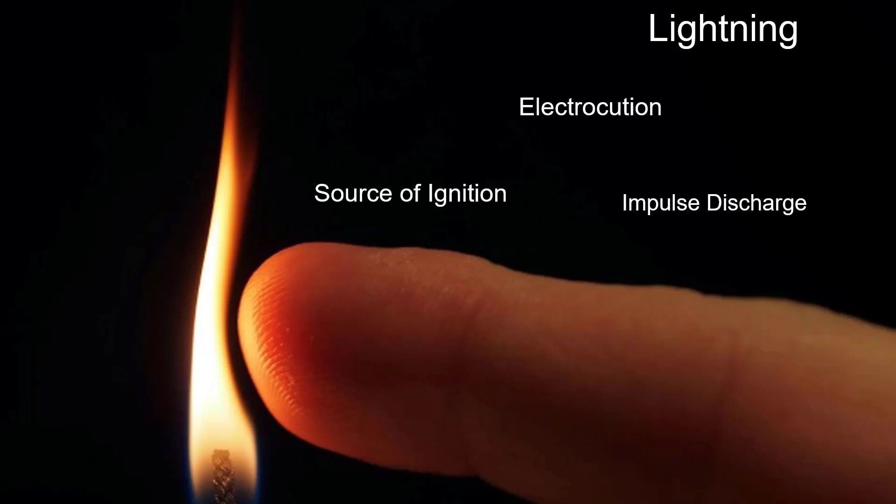IEC have conveniently categorized the risks into 4 categories. I'm going to cover those now, very quickly. Number 1 is loss of life, pretty straightforward. Number 2 is loss of service.

If you're manufacturing a product from a factory, and lightning prevents you from delivering and completing that manufacturing process, then there's a loss of service. There's also historical buildings, monuments, museums, that kind of thing, where there's a cultural element. And finally, good old economic loss.

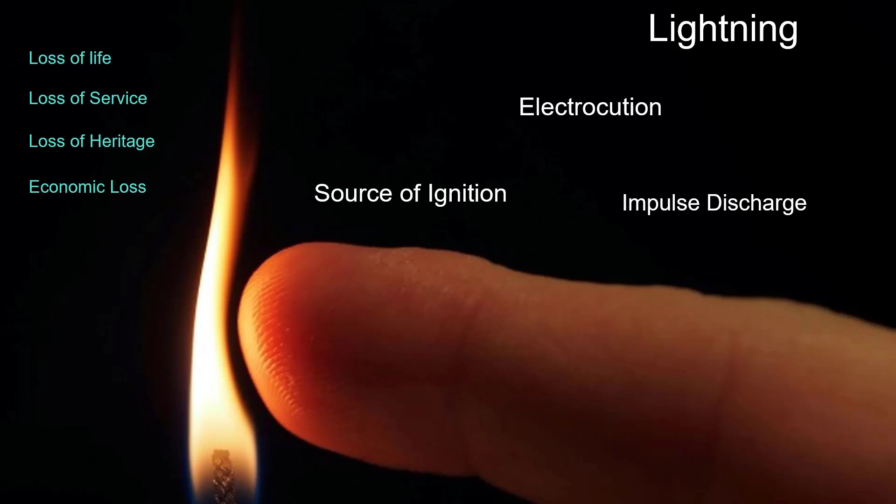Pure and simple. Trouble is, trying to unpick what the economic loss actually is, is a much more challenging task than you might imagine.

There's a piece from Liverpool John Moores University by Atherton and Ash in 2006, which suggested that 80% of lightning strike incidents involve a petrol-related item or product. And the NLSI calculated that in 2008, it cost the US economy $5 billion from lightning-related losses.

Let's take a step back here. This is back in 2008. We now know through climate change that this could be significantly more in today's context, especially since NASA's researchers have identified that for every 1 degree change in global surface temperature, there's a correlation to 5 to 6% increase in lightning activity globally. So that $5 billion back in 2008 might pale into insignificance in today's and near future's context.

Finally, lightning accounts for 61% of all incidents in storage and processing activities. When I say storage, that's bulk liquid storage, the petrochem type, and processing activities. Where there's been an investigation, 61% found that this was due to natural events.

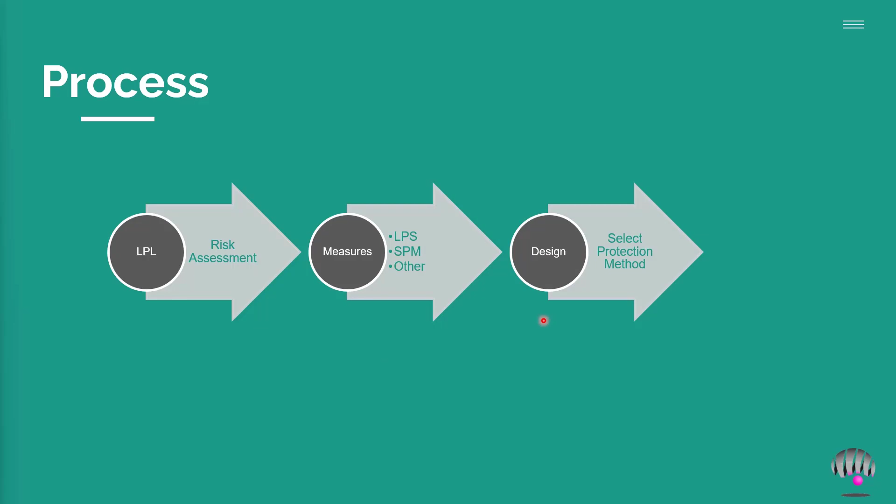Once you've done these two steps, then you can move on to the design side of things, where you select the protection method that you're going to use. So I'm going to bounce back into step one, the most important part of the process initially, to get that LPL. You consider the frequency of lightning, all the hazards that are there, what the occupancy is.

Is it a football stadium that's going to have 70,000 spectators at any one time? The level of panic is going to be huge if there's a lightning strike to that, so that's going to be a high risk issue. Whereas if it's an automated warehouse like Amazon or whatever, there's going to be very little occupancy there, so its threat to life is less.

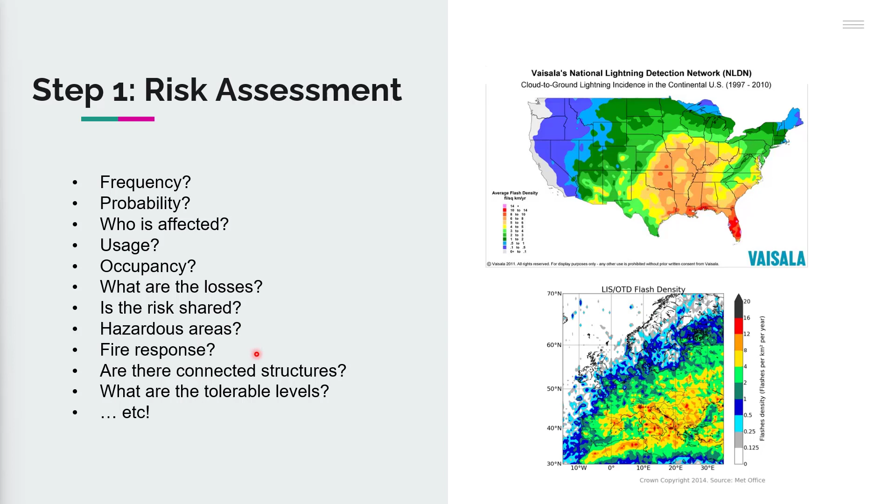Once we've determined the level of protection required, we then look at the lightning protection measures and the surge protection measures. We use DEHNsupport as our software tool to do a lot of the heavy lifting on the risk assessment. You can use a spreadsheet and do it manually, but honestly it's going to take a couple of months to code the spreadsheet, and if you get an update from the standards, then you're out of date straight away. So that's a risk in itself.

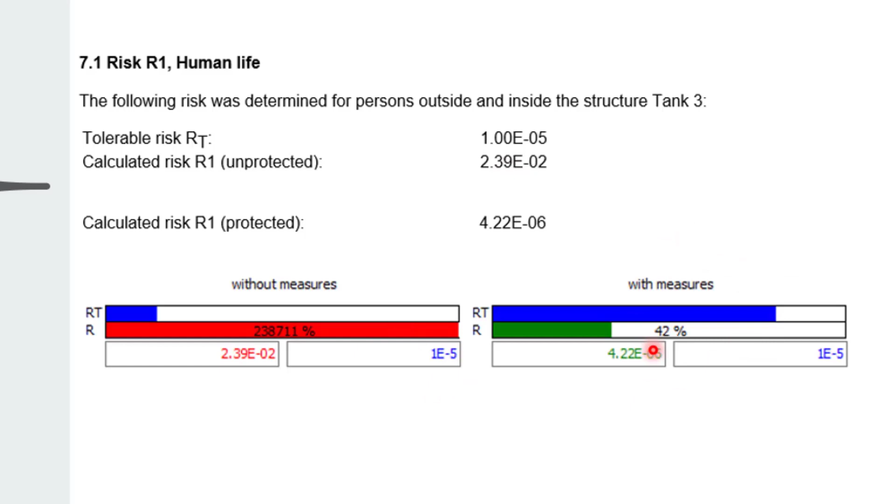What I like about this particular piece of software is that it gives a graphical representation. The blue ribbon is tolerable risk, which is tolerable risk for R1 is 10 to the minus 5 or 1 to the minus 5, 1 in 100,000. We can see that this one is almost off the scale in this case, but we've mitigated with our measures, with our lightning shielding and surge protection, and we've brought it down to almost half of the tolerable level, which has left us a bit of headroom to spare.

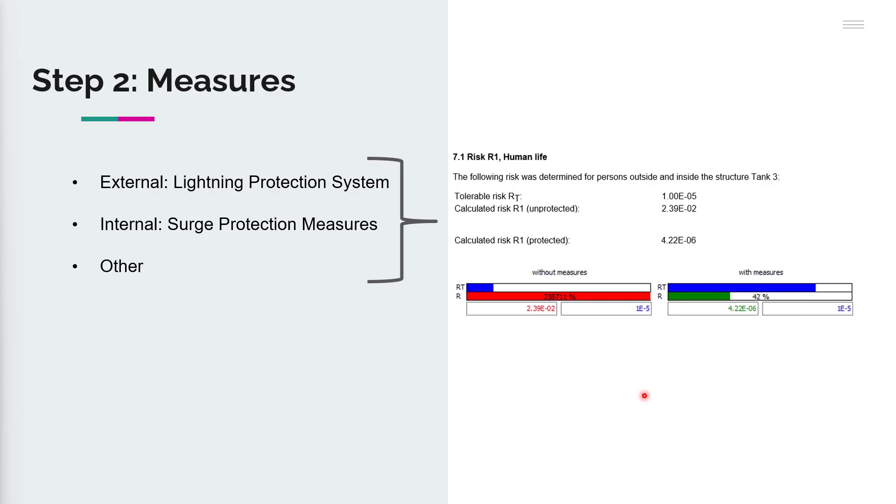So that was a good outcome there, which means that we can move on to the design and decide which protection concept we're going to apply to the structure that we're looking at.

Now, IEEE uses very similar methods to IEC. You call it fixed angles, we call it angles of protection. You also use empirical curves, we don't tend to use that in the IEC version, but you do use EGM, the electrogeometric modeling, which is equivalent to the rolling sphere. I think the Eriksson method is what you guys use on the IEEE.

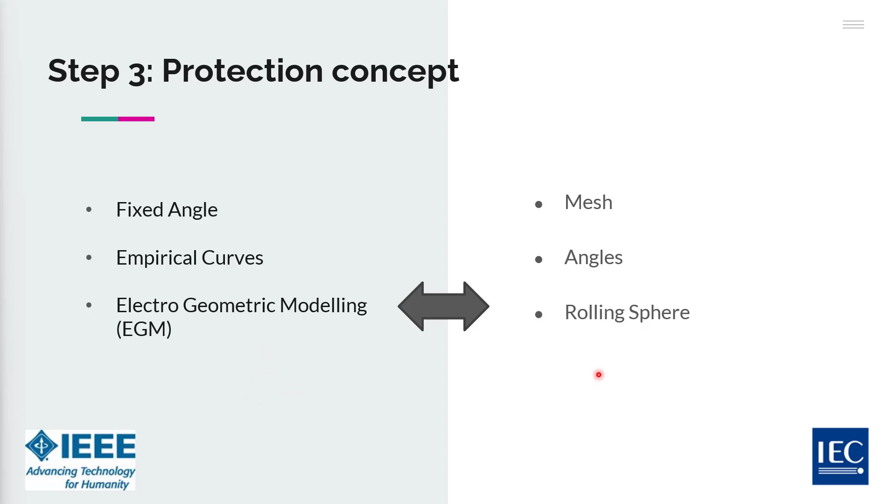We're going to take a look at rolling sphere next, in a little bit more detail.

Now, cast your mind back to the slide where we talked about the process of lightning, and if you recall, the point at which the downward leader reaches its last step, and it reaches its point of discrimination, it starts to want to hunt something to attach to. You remember that bit? This point of discrimination is the center of this rolling sphere, if you like. Now, the dimensions of this imaginary sphere are determined by the risk assessment, the LPL of the risk assessment that you did previously.

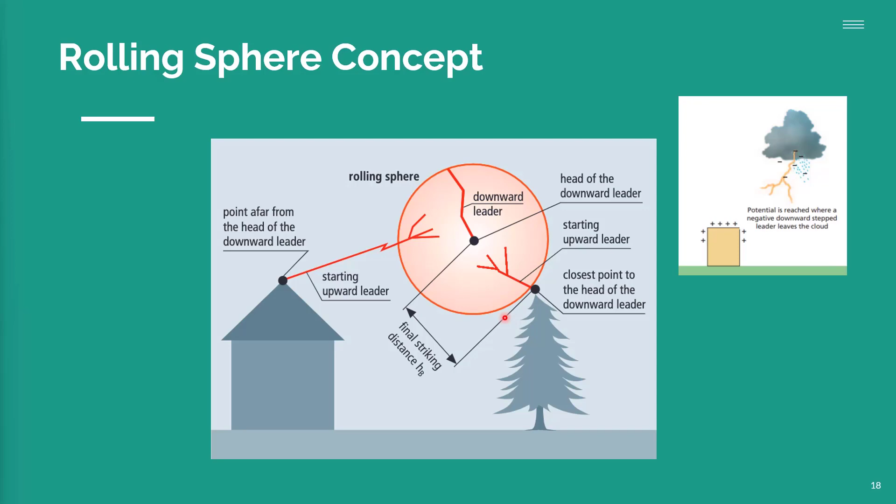But you can see that these are the upward leaders and the point of discrimination, and this is the sphere that we're going to roll in a minute.

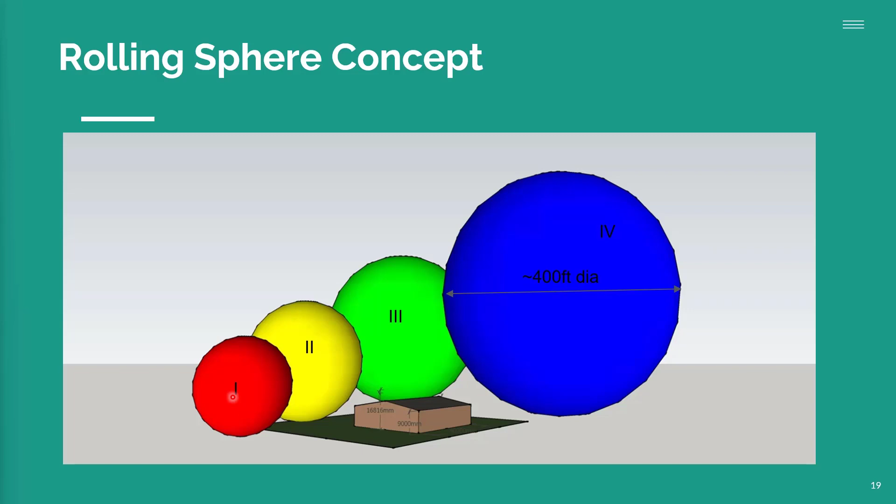I just wanted to give you this sense of scale. This is a 9 meter to eaves building, which is 30 foot, something like that. Has a diameter of 400 feet, its actual radius, pure radius, is 60 meters, 197 feet. Class 3 is 45 meters radius, Class 2 is 30, Class 1, which is the most onerous and the smallest sphere, is 20 meters radius, 40 meters diameter.

So we then roll this imaginary sphere around the structure or building surface that you want to protect. Where the sphere touches, here and here, that's a vulnerable point, this is where you need to deploy your measures, your shielding, because theoretically this is where attachment can take place. The void underneath, lightning protection zone 0B if you want to get technical, is less vulnerable and therefore considered protected, and you don't need to put any measures there, because lightning is a competitive event, it's much more likely to latch onto here or here.

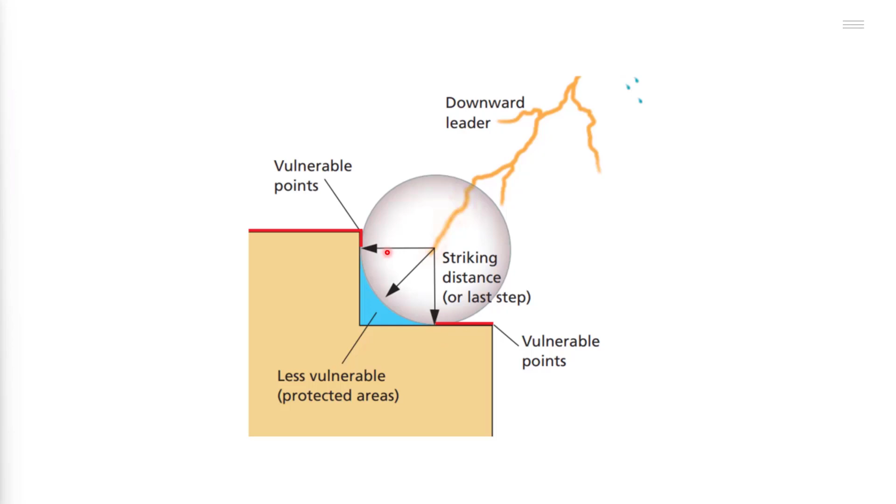Does that make sense? So let's see the concept at work, and I'll set this rolling.

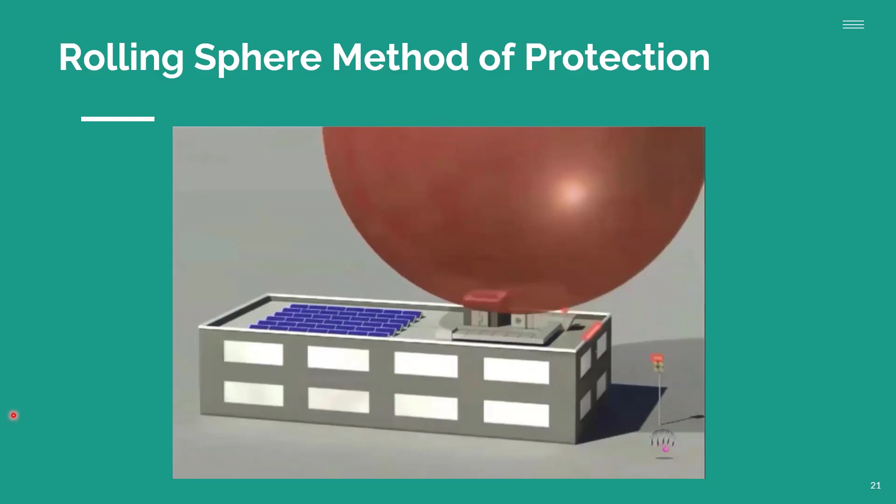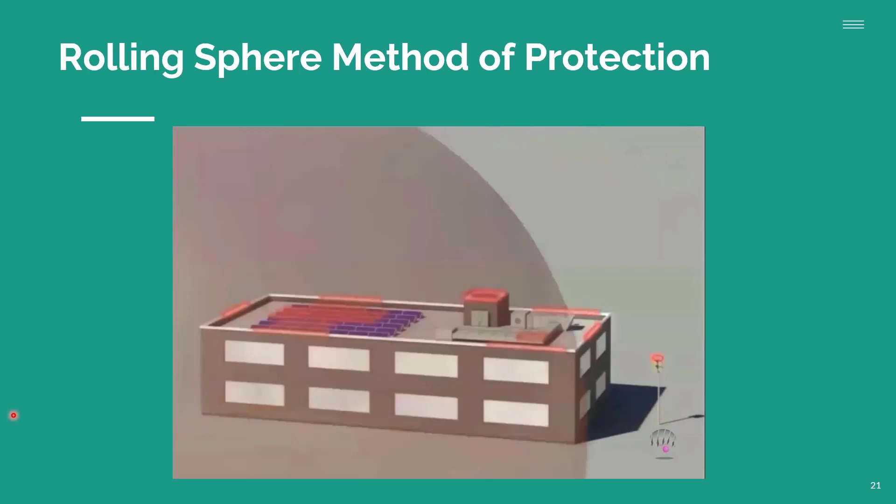So as the name suggests, once we know the size of the sphere, we roll it across the surface of the building we're interested in. Now, the beauty of the rolling sphere method is that it copes with complex geometries really well, which is why it makes it the most technically secure and robust method of protection that we can use.

So you can see now you've got your areas which need some kind of protection installed - a little CCTV camera here included - and we can look at protecting those in more detail.

Now, this video made it look easy, but trust me when I say, if you're trying to do the rolling sphere method in 2D, you will be CADing out arcs and circles galore for days and days and days. It takes ages because you have to consider how that ball rolls in 3 dimensions. And this method is very similar to the Eriksson method, which is also supported by the software tool we're going to look at in a minute, XGS Lab Shield.

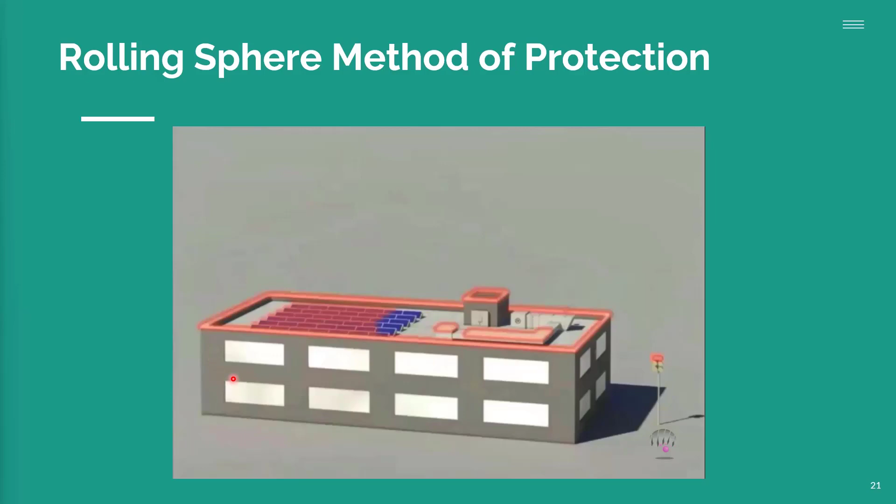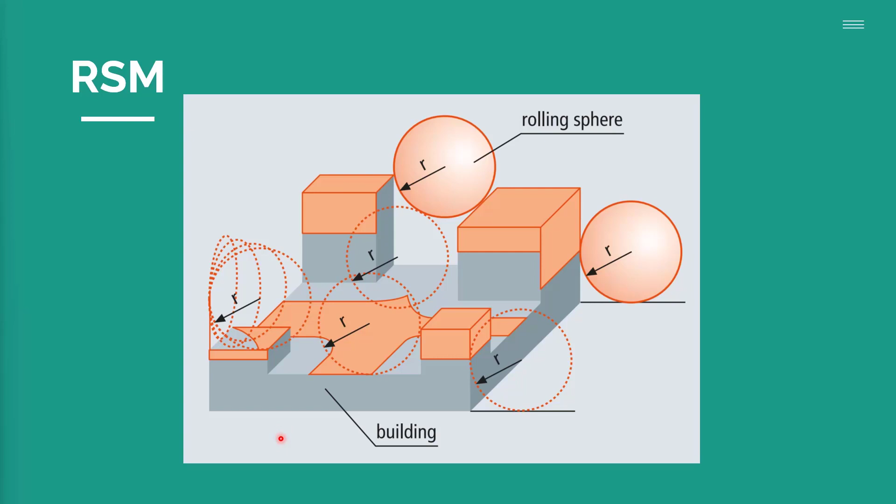So why rolling sphere over angles or curves? Well, as mentioned previously, the rolling sphere method handles complex geometries really well. The angle method is a simplification. I don't intend to go into it greatly here because we can run courses on this for like 4 days at a time. But if you're interested in technically secure, robust protection designs, then it's rolling sphere, the EGM method, that you really need to look at to get the job done properly.

Just to say, I've mentioned a couple of tools here already. At Grey Matters, we use this risk assessment software tool called DEHNsupport. There are others available - we're not promoting this in any kind of way. The other tool we're going to use, and dig deeper into now, is XGS Lab's Shield.

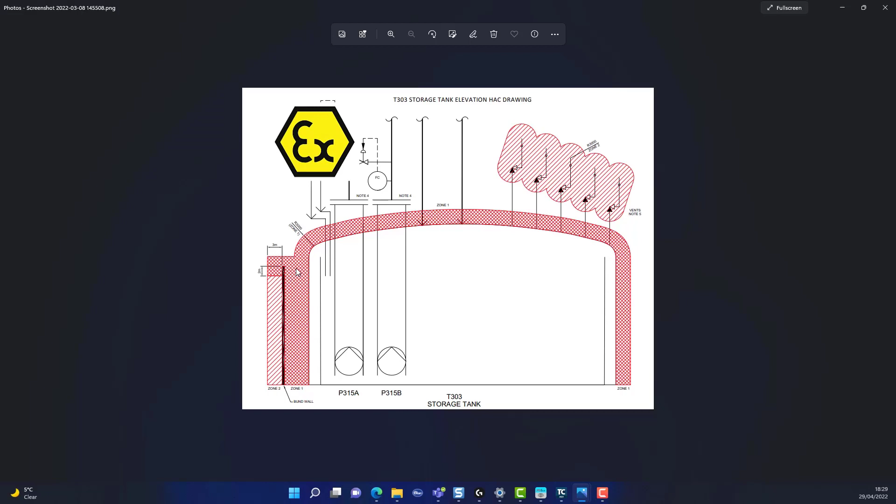Another interesting thing about this is that there is an ATEX component to it. So you've got a zone 2 covering the purge vents, and then there's a volume of gas that surrounds the tank, which we have to be mindful of and take account of. So although it's a pretty straightforward structure geometrically, it's got its complications.

So the first thing we do before starting anything else is to CAD up in 3D the actual tank in a wireframe format. Now you can use any version of CAD that you want: SolidWorks, Revit, AutoCAD. I've got TurboCAD in front of me because it's actually quite a cost-efficient option.

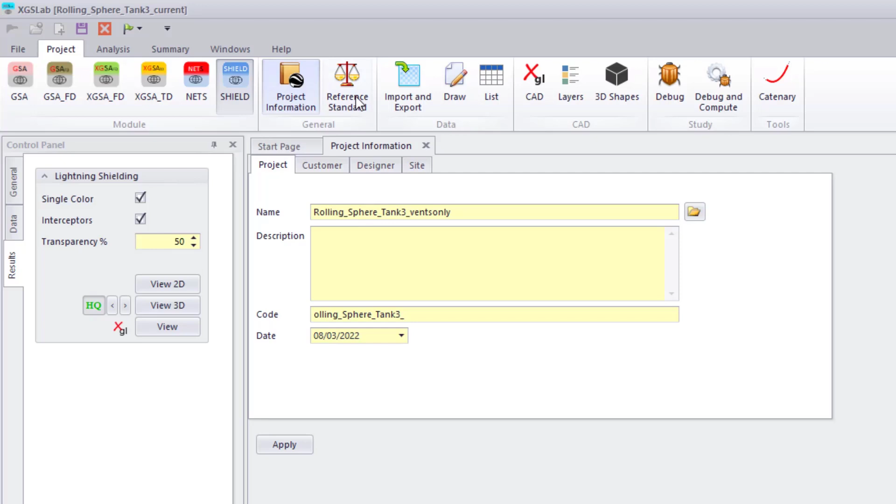So once we've got our wireframe in 3D, we can then import it into XGS. Today we're looking at Shield, and what we do is follow the top ribbon from left to right in sequence. You would normally put the name, what you're looking at, the project name, the customer designer site, if that's relevant - I won't go into that bit here. It's pretty straightforward. So from the project, we then choose our standard. Today it's IEC 62305, and then we'd click on the import option here and steer it to the TurboCAD version and the DXF version of it, and click import.

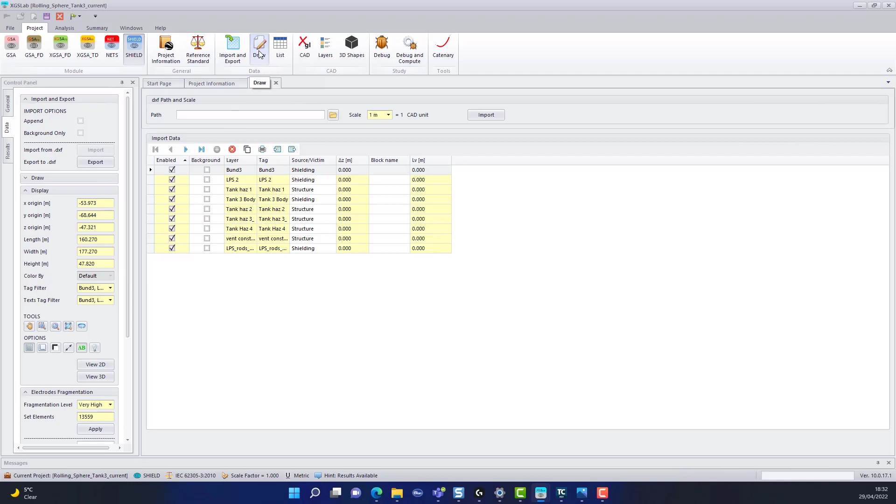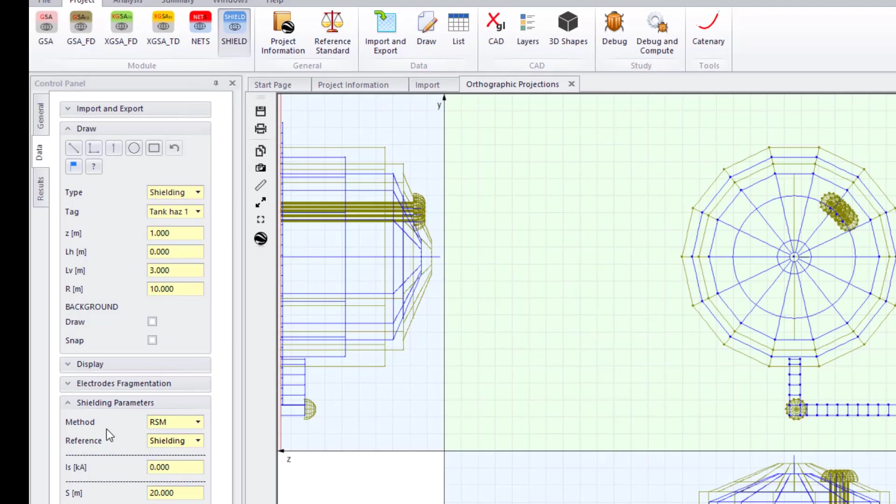Now, to cut down on time, it does only take a couple of minutes, but this is one I prepared earlier. And then we can go to the draw and the layout. So this is a layout, a plan view of that tank. There's a steel trestle supporting the pipe work, and a front elevation and a side elevation to the left there. So that's your orientation. We can then work down the left hand side across these tabs here.

So if you were going to add some more components, maybe there's a lighting mast or something, then you could drop in a vertical conductor to represent that. But what I would say is XGS has limited CAD ability - it's not a CAD tool. So what I would encourage you to do is to do as much CAD as you can in the specialist CAD package, and then export that into DXF and import the DXF file into XGS. Because the XGS, it's where its value is actually in the computational side of things - that's where it does the heavy lifting for you.

So that said, we can look at adding some stuff if you need to, and then just as a sense check, you can view things in 3D as you want, zoom in, pan around, whatever the usual kind of controls.

Now we move on to the shielding parameters, and we've chosen RSM, rolling sphere method, and we're referencing the shielding, that's what we're interested in. Next variable is to do with the Eriksson IEEE method, so we can ignore that in this case. There is a calculation that it does for you for the Eriksson method, so it's very user intuitive and helpful.

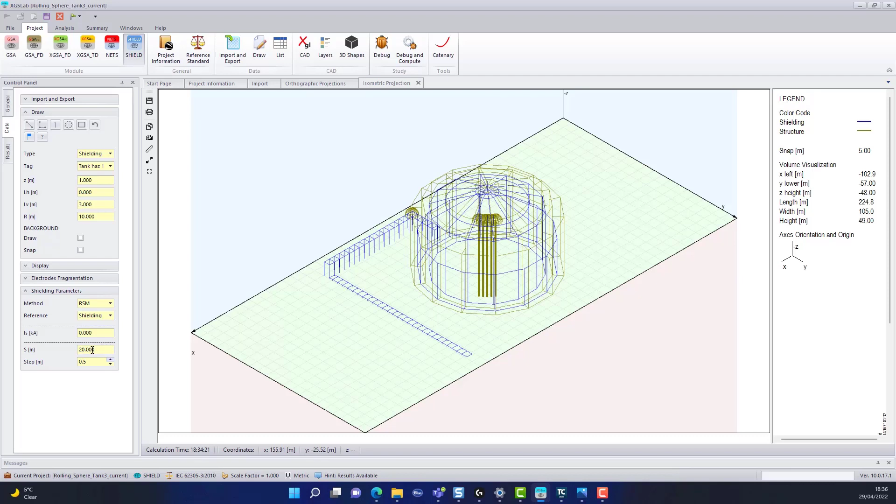The S value is the rolling sphere radius in meters, and because this tank is fairly sizable - in actual fact this is in Northern Europe - you've got a class 1 determined in the lightning risk assessment. Knowing it's a lightning protection level 1 means the rolling sphere radius needs a 20-meter radius, which is why that's there. Half a meter, that seems fair. You'll see the results are based on half a meter, and you'll see it's fine for this application.

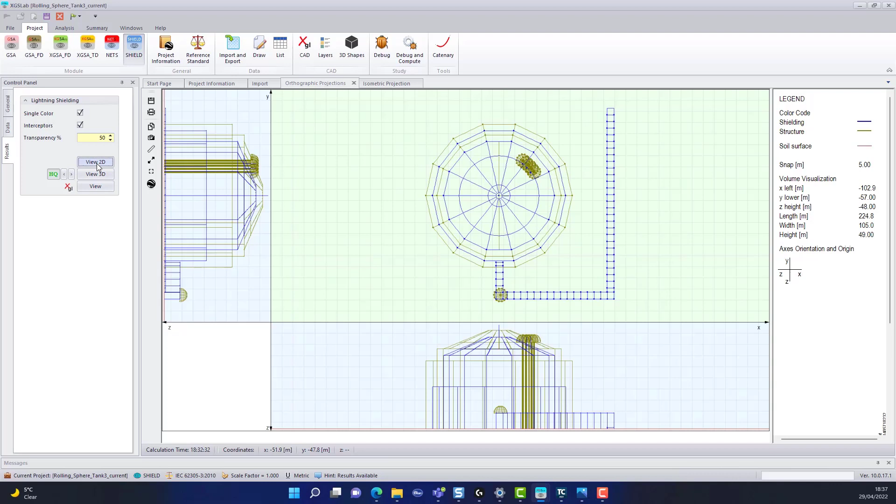So we go to the results. We've got a choice here of 2D and 3D and this XGL. 2D, if I click that, it generates the calculation pretty quickly. We can see immediately over here, it gives the result: not protected.

Let's just work that into a 3D view a second. So it's given the 3D as a mesh kind of view, and you can see that the tank itself has got a protection blanket over it, but the gas volume outside, zone 1 and zone 2, are vulnerable. So we could get lightning entering that volume. And as we know from previous, if you've got something that's 30,000 Kelvin, it's going to be a pretty significant source of ignition, and that we don't want. So in this case, it's just showing the vulnerability, and it's not protected.

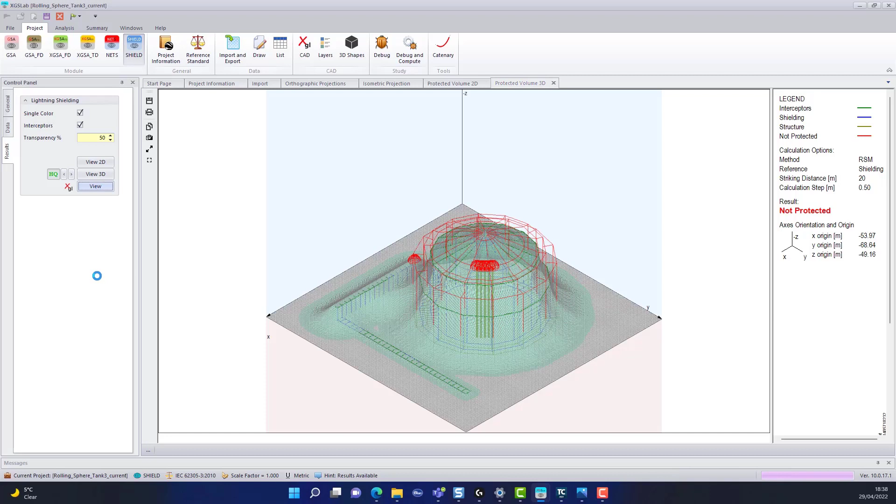We can look at this in more of a rendered view. Let's just change the background a bit, get rid of the axes - they're just a bit of a distraction. Let's move that over there and go in. Like I say, you can change the way the representation is presented as much as you want.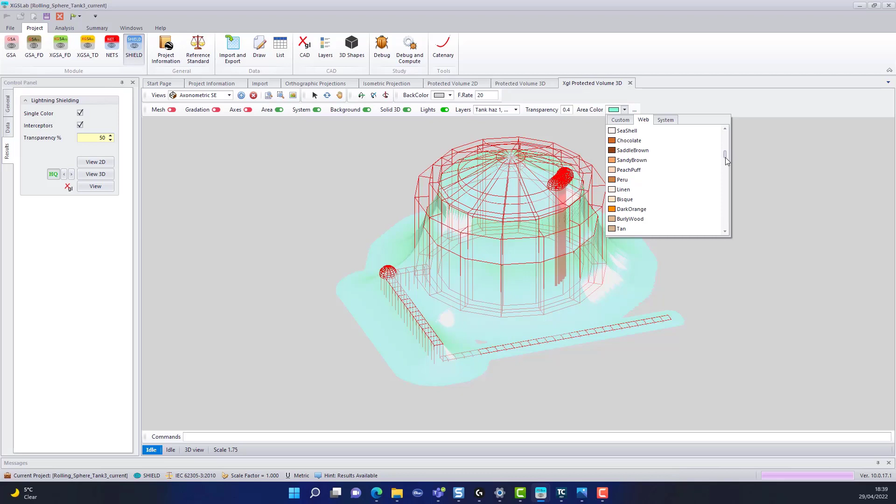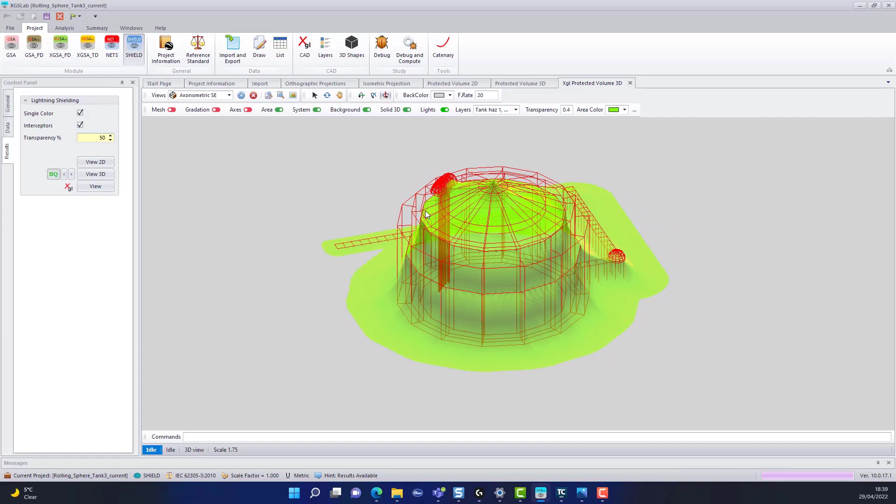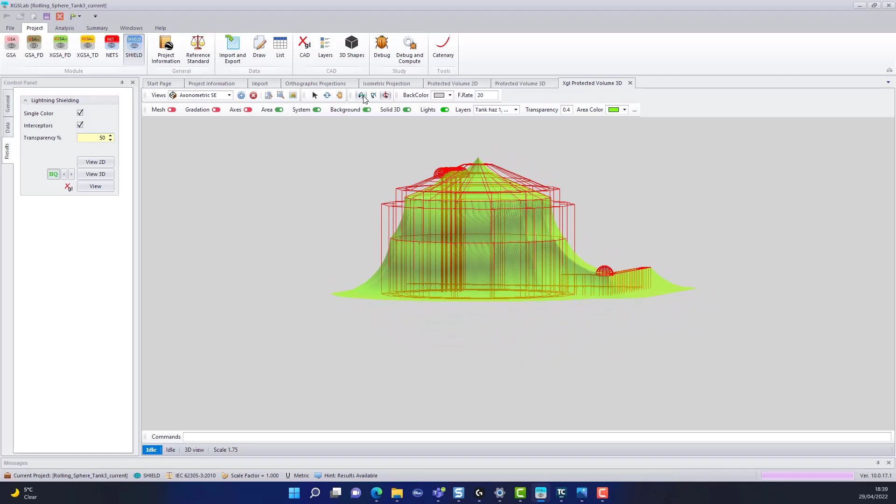You've got even the colors of the actual blanket - I like this lawn green because it's quite contrasty. And then you can set it in motion. You can actually see in real time where the gaps are in your protection. In this case, we can see that the tank and the bund, yeah, fine, looking good, but the gas volume surrounding it is vulnerable. So that's a quick representation, and we can move it into whatever plane we want to see it in that's going to help us understand what's going on.

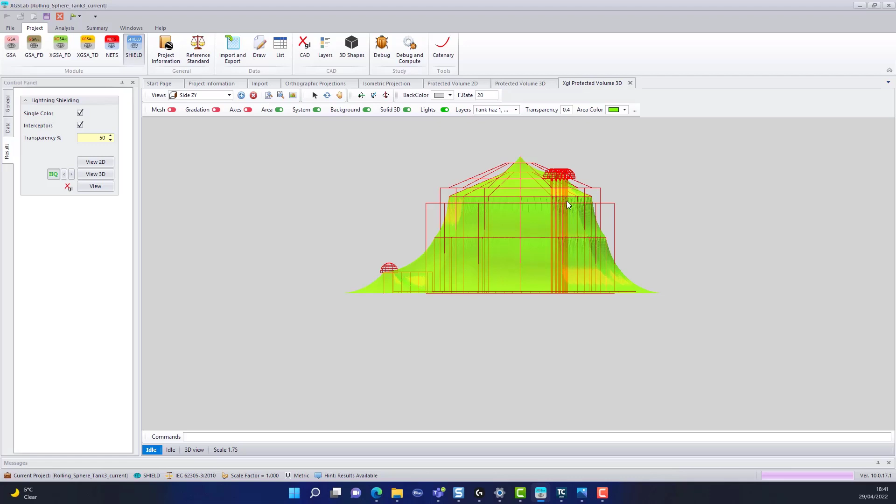So what else can we do? We can choose fixed views if we want to. So knowing we've got some gaps in our protection solution, should we call it, we can perhaps work up a different kind of strategy here.

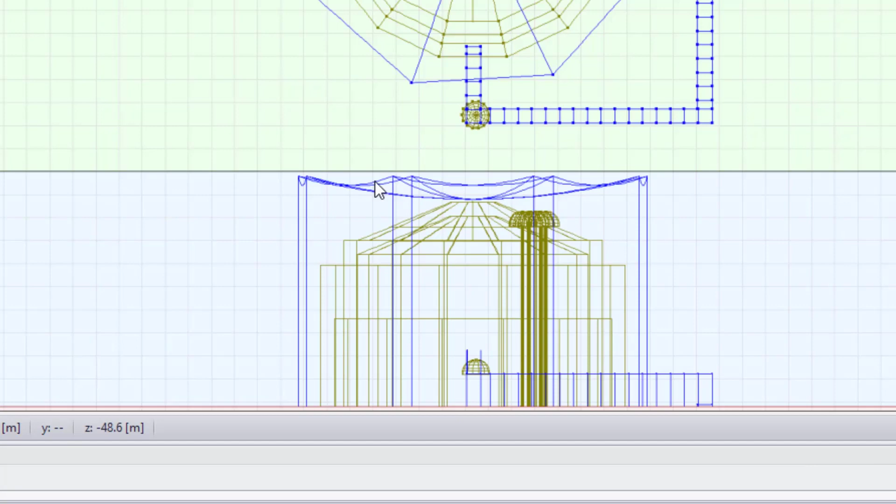Going back to our layout, what we've got here is, we can introduce some catenary wires. Can you see the sag of the catenary wires? There's a really useful tool in here that helps you calculate what the catenary sag would be, to enable you to get these realistic things. This is taken from the power of the earthing versions, where you might be modeling an overhead line of 400-500 meters, and you need to understand what the sag is to represent, for perhaps you've got an electromagnetic field study that you're doing.

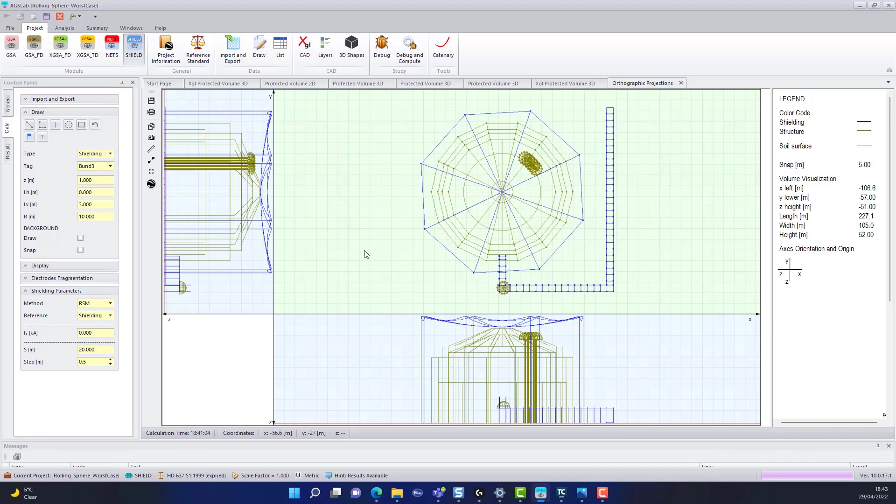So we're migrating that capability across to the lightning protection side of things. This is just to show you that you can use catenary wires, air rods, whatever it happens to be. So we can check out to see whether this will work. Let's have a look. If we go to 2D view, well, success - we've got a protected volume now. We can see it in side elevation and front elevation. It all looks good, and we've got green, nothing poking out of this greenness.

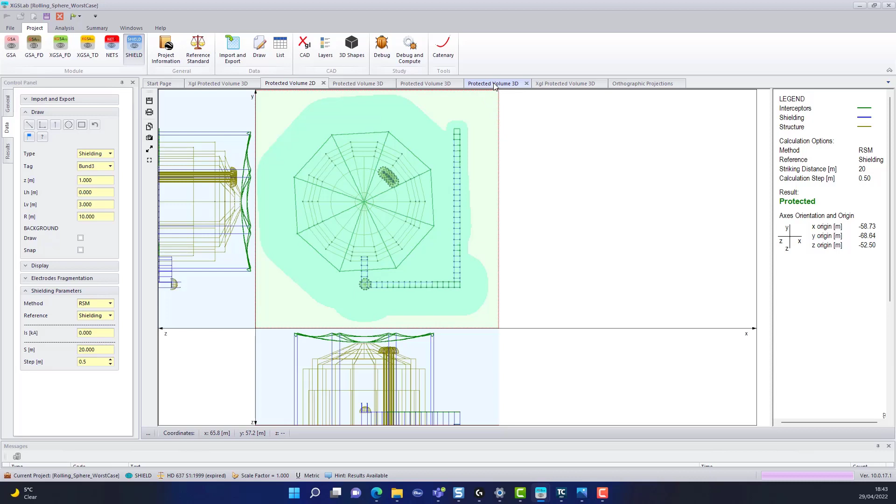So that would indicate to me that everything's good. But let's have a look on the 3D view and see whether that is the case. We've got our lovely lime green blanket. And let's maybe increase the transparency, I think, probably. There we go.

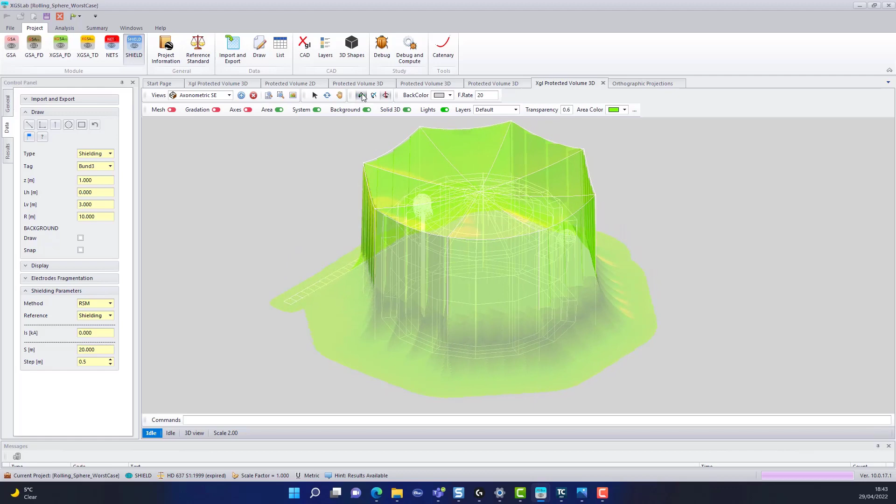Let's pitch that up a little bit. In fact, let's have a look at this in side view a second. So we can see from this side view that everything is kind of... let's stop that there, come back a bit.

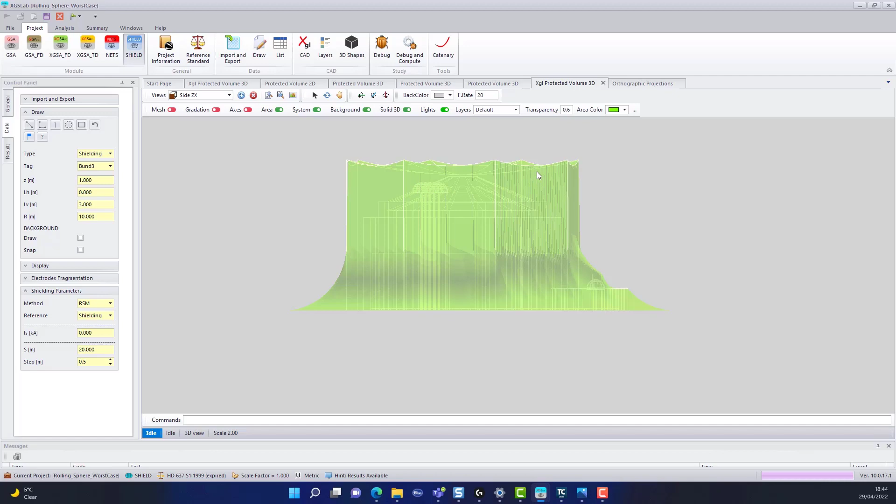We can see that the valves in the trestle structure are protected. We've got some finials coming up, air rods as you might call them, to protect that area. We've got the purge vents protected here. Everything looks good. I'm not saying this is the ideal solution, but it is a solution to making sure that lightning is less likely, mitigating the risk of entering and attaching into that volume of gas, which could be explosive at that particular moment in time.

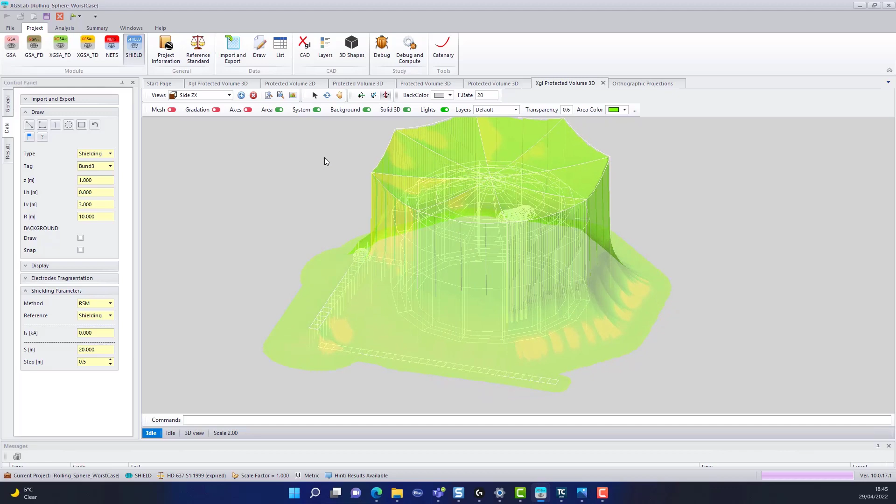What else can we do? We can change the color of the blanket, the protective blanket. I call it a blanket, but that's because it looks like one.

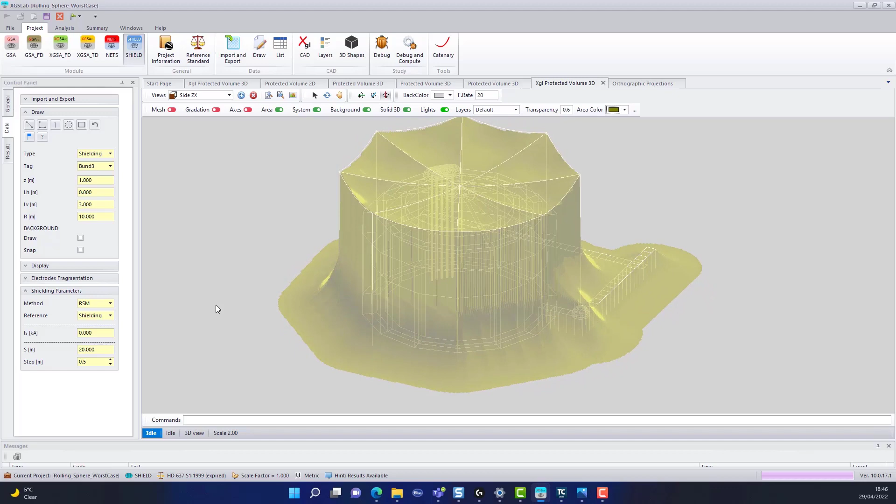So reiterating what we learned in previous slides, the beauty of the rolling sphere method and EGM under IEEE is that it can handle complex shapes, complex geometries, complex sites.

So let's have a look at a more complicated geometry here. What does this one look like? Okay, so what we've got here is an AD plant, anaerobic digestion plant. We've got something over here, which is the methane collection bubble, and you've got some digester tanks, processing plant, some CHP, combined heat and power units here, and a stack over here. Let's have a look and see what this looks like.

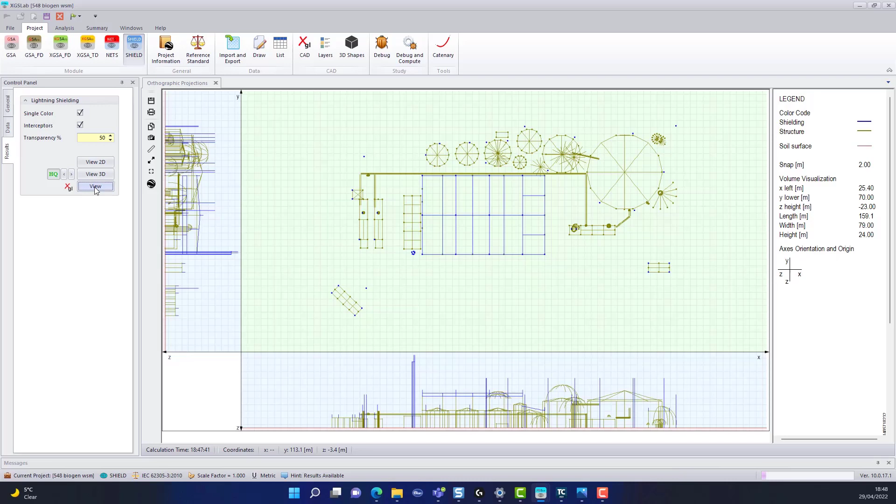So I'll go into results. Let's take that to light grey. Again, it's a pretty rudimentary wireframe model that you're looking at, but you can see now that you can actually model the entire site and the interaction of each structure with one another. So not just, for example, looking at that LNG tank in isolation, but you can actually look at the tank and all its surrounding neighbours, if you like, just to see what's happening.

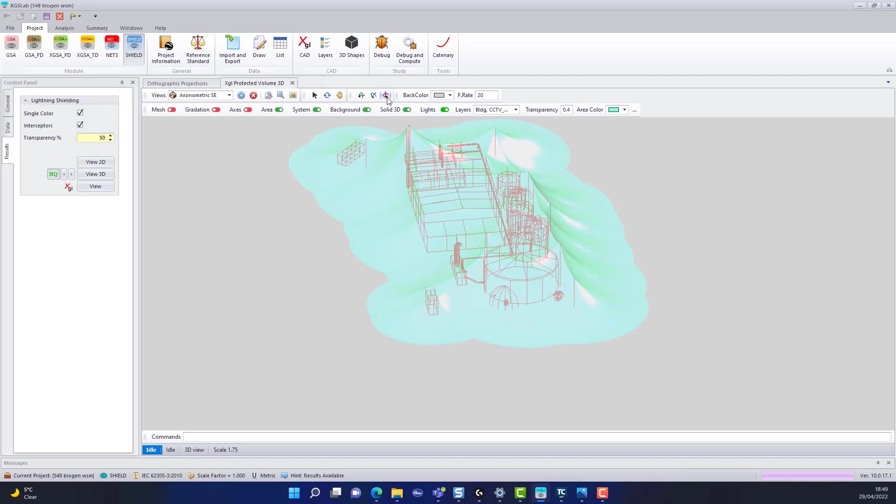And this is what's happening here. Let's change that to lime. Does that help? Probably not. Ah, there we go, dark green. Okay, who'd have thought it?

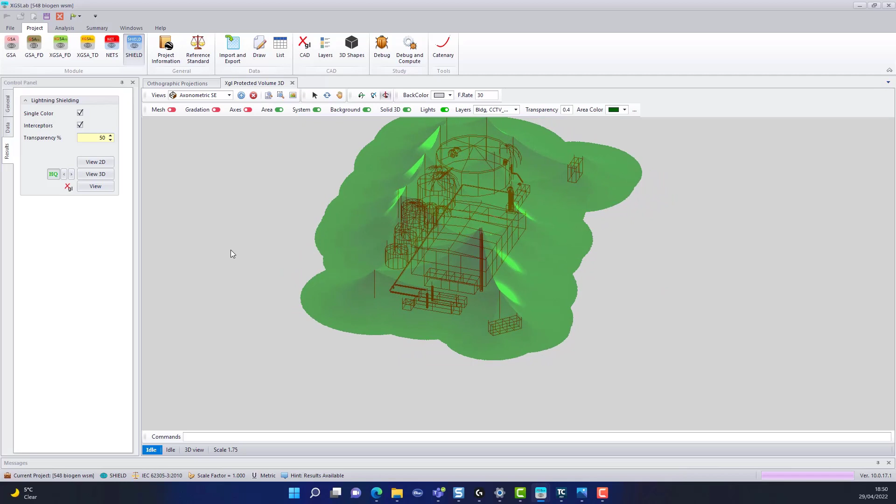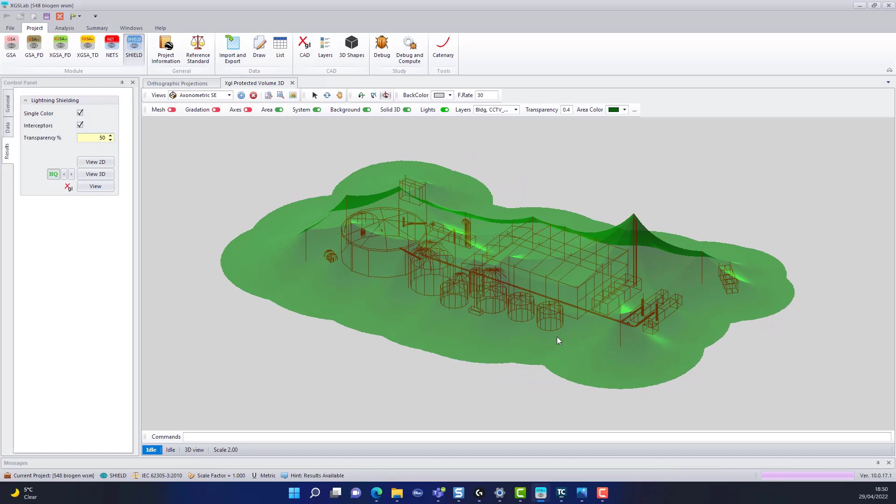But we can see now how the interplay of stacks, lighting columns, and the CHP unit lets us start to deploy the shielding measures in an intelligent way to give us the protection blanket that we need. This particular site has also got these, which we've represented again as little umbrellas, and those are the ATEX zones.

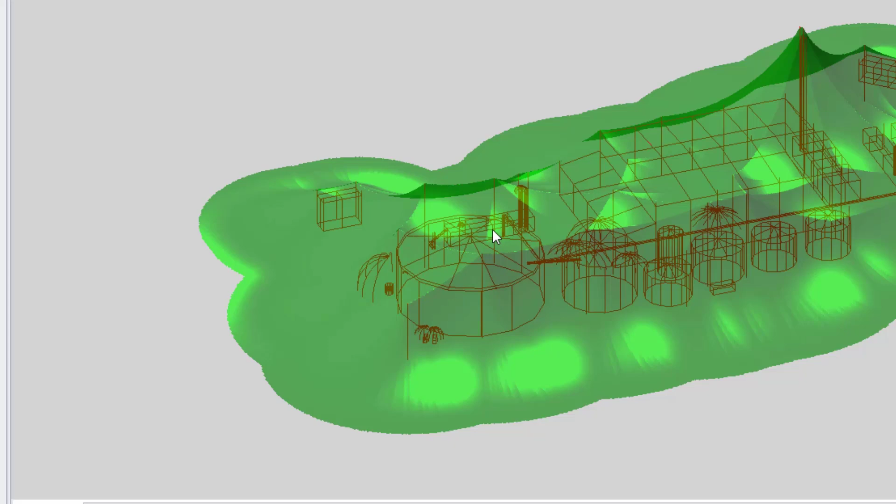There's no need to model complete spheres because that would be computationally quite heavy, so if you thin those down, that's another useful technique to keep the computation time down. For example, this structure here isn't actually a structure, it's a fan, a blowing fan that pressurizes the membrane on this tank, and it has a gas zone around it. So there's no point modeling a complete sphere. To keep the computation load economic, we only need fairly scant representations of the gas volumes, enough so you can see where the protection is and where it's not.

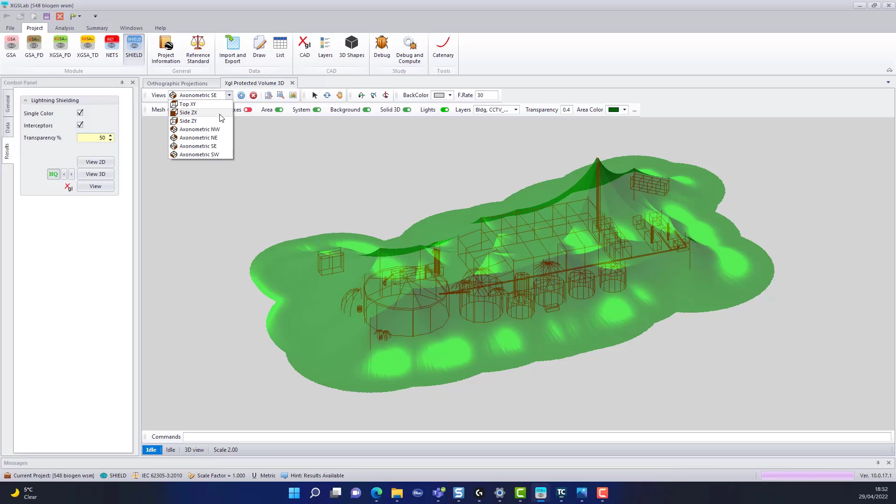So let's have a look at a side view, for example. You can see just these gas volumes above the tanks themselves.

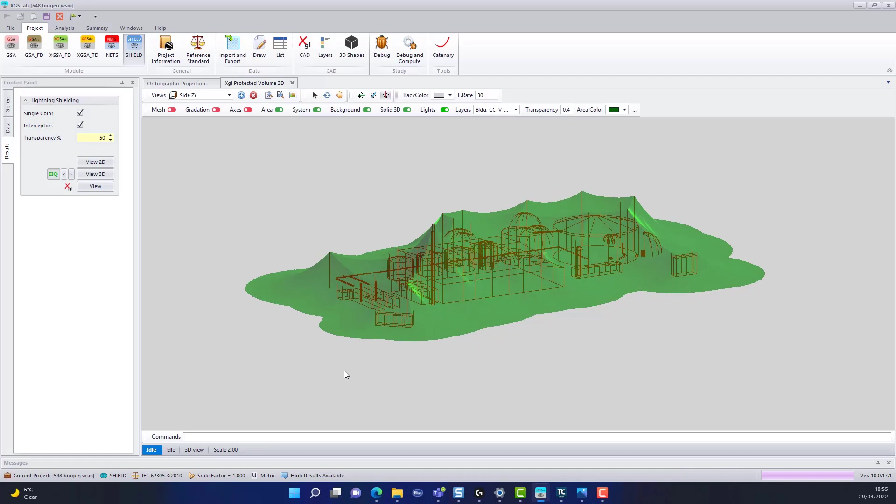They're quite high up. So hopefully in this last 10 minutes, we've given you a feel for what is possible, and the tools we're using today to take some of the heavy lifting and make our lives a little easier in terms of time, so that we're not spending an inordinate amount of time CADing things up when we've got tools like this that can do the heavy lifting for you. So we can work in a productive way.

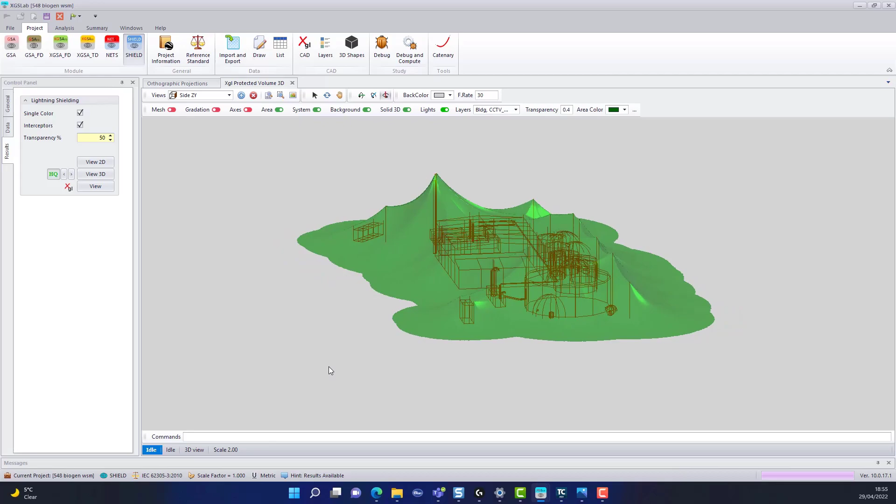So I'm hoping that addresses the question about side flash. Yes, it does cater for it.

Another question is how detailed is the report from the software - what does the output look like? On the screen you're seeing the rotational render of the model. To get that into a report, you can do a screen capture on video, but there are option buttons which will screen grab whatever you pointed at and allow you to copy and paste it into your report.